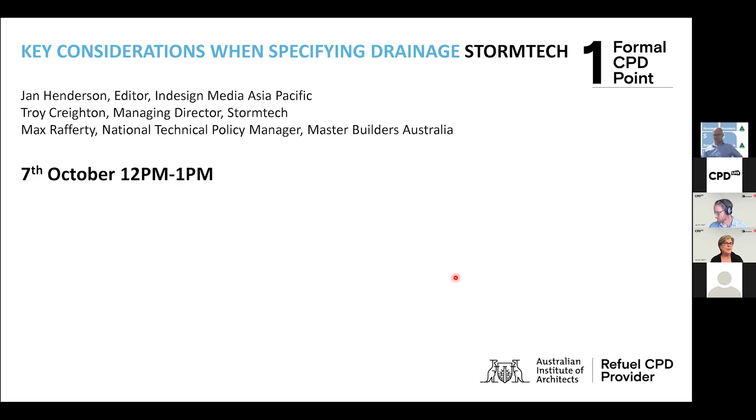Drainage has developed significantly over the years. Innovations like the linear drain have not only provided specifiers with effective ways to prevent flooding, inundation, and subsoil degradation, but also opened up fresh design possibilities.

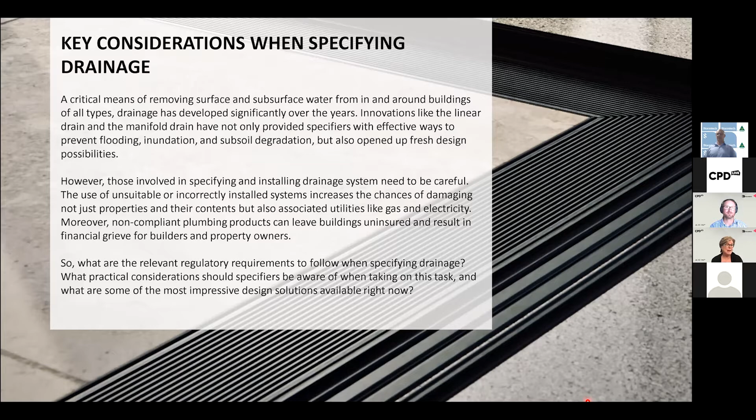But what are the relevant regulatory requirements regarding drainage? What practical considerations should specifiers be aware of? And what are some of the best design solutions available right now? This session, entitled Key Considerations When Specifying Drainage, will answer these questions and more.

By the end of this session, you should be able to identify the relevant code requirements that relate to drainage, evaluate practicalities involved with choosing and installing drainage, apply knowledge and troubleshoot problems associated with drainage installation, identify and define design solutions that conform to the code requirements, and evaluate and apply knowledge for the best environmental outcomes.

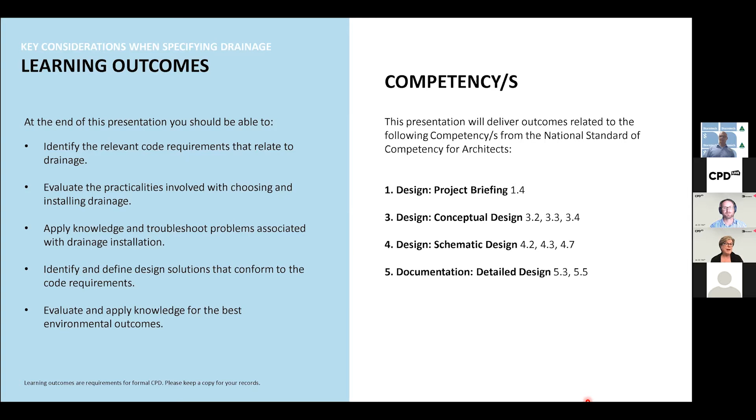Firstly, to you, Troy, could you tell us a bit about Stormtech? What does your business do and who are your clients? Considering today's topic as key considerations when specifying drainage, can you talk us through some of your recent projects?

Thanks, Jan. So Stormtech was started by my father in 1989. Drainage came to us as a solution for our own business. Dad was a concreter and we needed a more elegant solution than your simple cast iron ladder grates in a channel drain. So Dad's inventions spurred the way for architects, engineers, and builders to look at drainage in a different way. And one of the key things that Dad helped develop was the shower channel, which has become certainly a global success.

Recent projects, Barangaroo Roof would be one that most people are familiar with. We've done everything from bathroom drainage through to courtyard driveway drainage, underground, and even some underwater grills and grates that I've only recently found out about.

Fantastic. And Max, can you tell us a bit about your role at the Master Builders Australia organisation? Yeah, hi, thanks. Look, my role as the National Technical Policy Manager with Master Builders involves providing technical advice to the Australian Building Codes Board. I sit on numerous Australian standards, and I also host a Master Builders podcast. So that gives you a bit of an all-round picture of me.

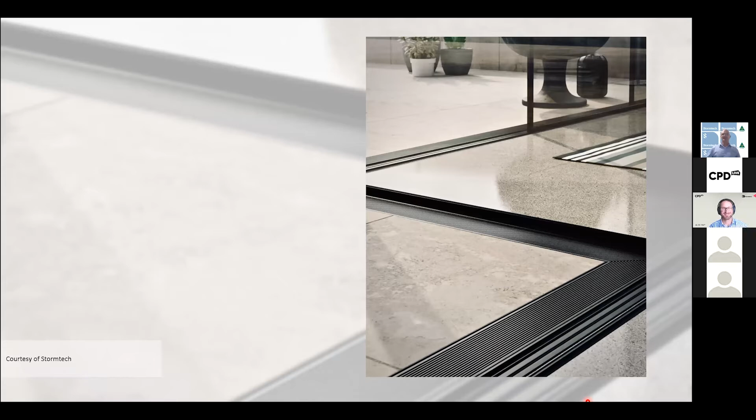So obviously, key considerations about our drainage. I'm going to focus on two areas, and it's pretty obvious. One is stormwater drainage, and the other one's sanitary drainage.

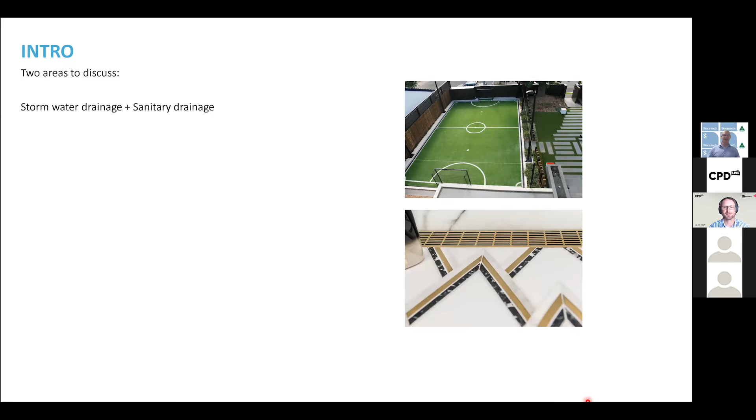What can they be made from? So before we get to the drains, we really need to have a bit of a fundamental idea of what we can make our drains from. For stormwater, there's quite a list here, and as you can see, for roof drainage, so it's not what I do, although we will do rainwater heads and so on where people need a custom solution. There's a huge variety of materials that you can do your roof drainage from.

So why can you use a large variety of materials in roof drainage? Mainly because they're not in the ground, they're less exposed to the conditions, the really nasty conditions that in-ground drainage is exposed to. As you'll see, in-ground drainage is quite a limited range of materials.

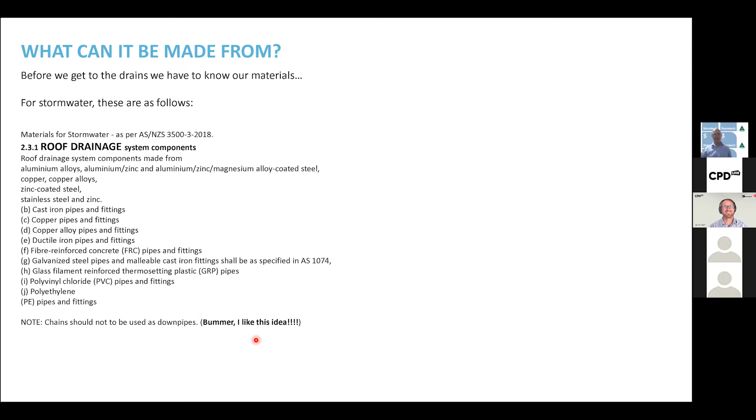And one of the things I picked out from going through the materials and so on is that chains should not be used as downpipes, which is a bummer because I always liked that idea. I thought it was a fantastic little feature, but can't do it anymore.

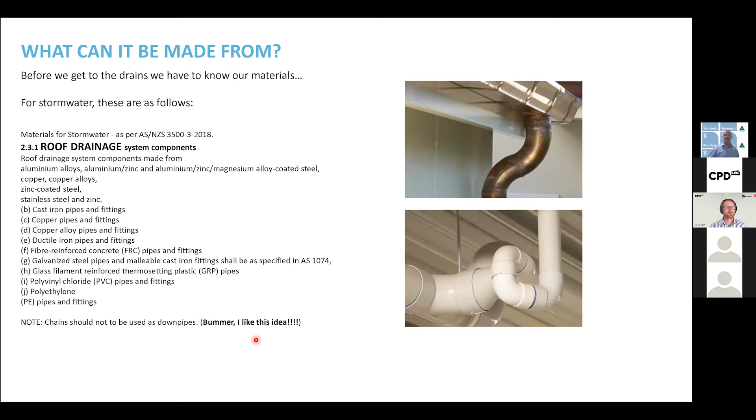So here we have copper. We have stainless steel over copper in this application. There we have PVC. You'll also see that sometimes there are materials that, although you're allowed to use, you can't use them together. So things like copper and zinc, copper and lead, and so on—they can be used, but in a specific method. Now, for stormwater drains, non-pressure, you see the list is quite a bit shorter.

When they're saying aluminized, a bit of an Americanism has crept into our standards there - that's a galvanized or Zincalume style material, not aluminium. We'll get into that quite specifically later. These materials are all tried and proven over many decades.

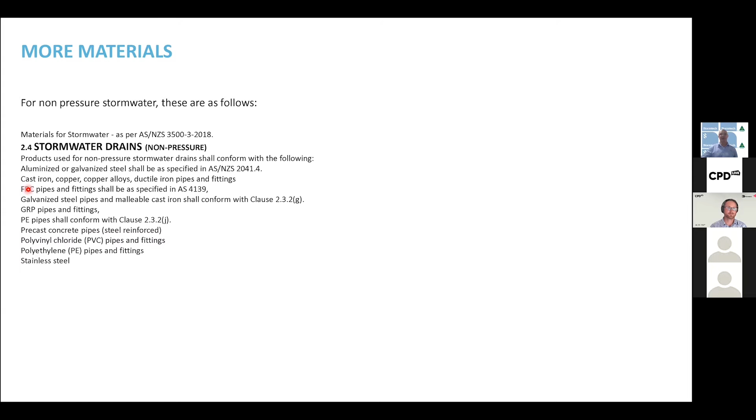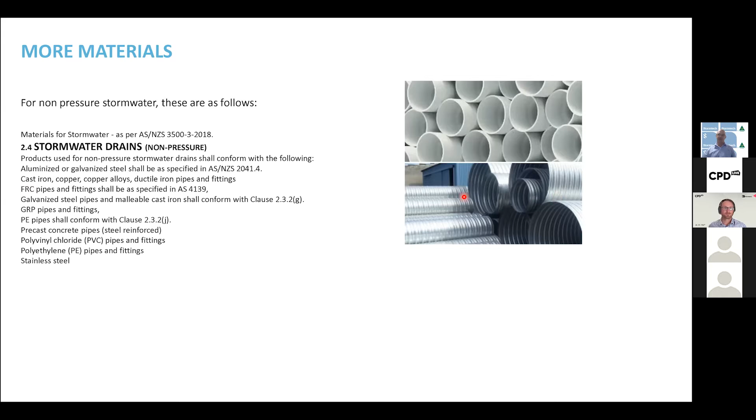See, we have some PVC pipe. There we go, you have your large culvert style. This material, just to give you an idea, typically that's used as formwork as well. And then we have everyone's favorite, the concrete pipe.

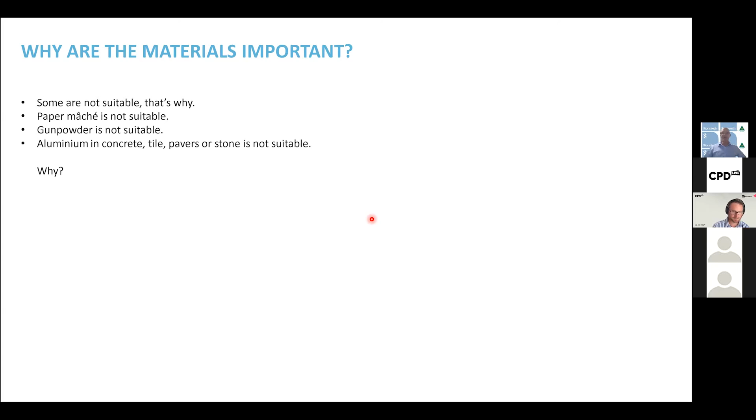As I mentioned, why are some materials important? Well, some aren't suitable, it's that simple. If you look at gunpowder, it's not suitable as a drainage material, nor is paper mache. I think really it's quite obvious.

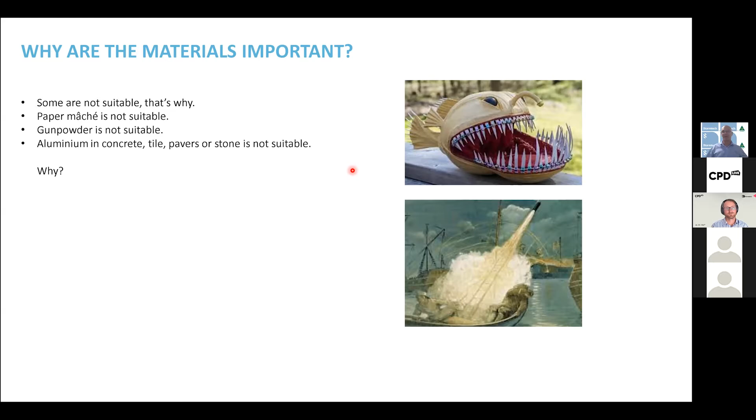Aluminium in concrete, tile and pavers or stone is not suitable due to the alkalinity. This is one of the times when you see something and think, oh yeah, aluminized is okay, but it's not. The Aluminium Council of Australia and the Australian Window Association did a joint technical bulletin. This is available in the summary, I can email it out to anyone that wishes. It's contained in there.

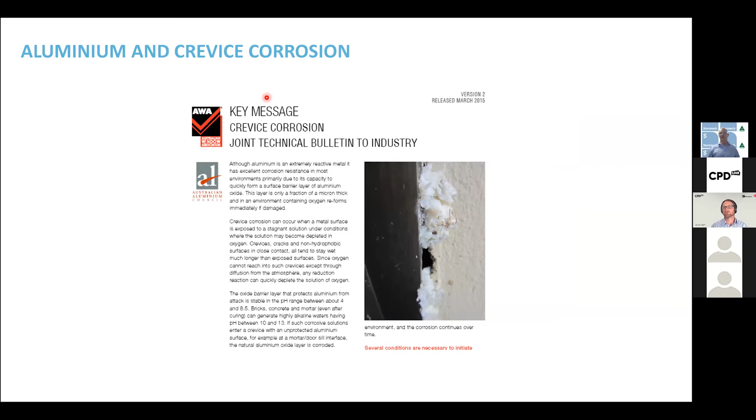Primarily, aluminium is stable in a pH range of about 4 to 8.5. Why is that important if we're not talking about a swimming pool? Well, bricks, concrete, stone, tiles generate waters of between 10 and 13 - 13 when concrete's fresh, 10 once it's cured, which is still above the 8.5. Bear in mind, this is the Aluminium Council and the Window Association, so the true experts of this.

This issue, as you can see here, where you're getting crevice corrosion, needs a recipe to be adhered to closely. You need alkaline waters above 8.5, and you need stagnant water - stagnant water is water that is depleted of oxygen. Just think of your smelly pond, or something you've stumbled across in the bush, or you've lifted up a paver and seen some stagnant water under there. It's depleted of oxygen.

So what happens then is the water depleted of oxygen attacks the anodizing layer - anodizing, no magic there, it's simply aluminium oxide that's force grown. They put it in a bath, run a current through it, and force grow the aluminium oxide. Key word in there is oxide. What happens with the stagnant water in the alkalinity range that aluminium doesn't like is that stagnant water starts to hydrolyze the oxide out of the aluminium, and then the aluminium eats itself in this environment.

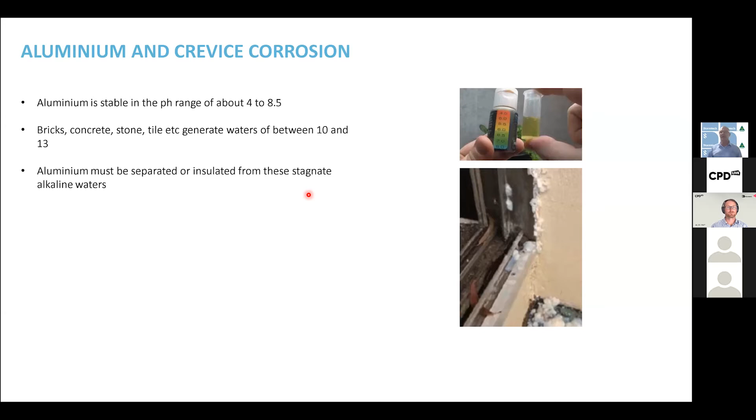That stagnant water, because it's depleted of oxygen, can turn into one of two things. One, a mild sulfuric water, a very mild sulfuric acid, and you get the rotten egg smell. Or the other one, if there's salts around, it can be a hydrochloric acid - very, very mild, you're not going to burn yourself with it, but it'll certainly eat the aluminium.

Aluminium and galvanic corrosion. Aluminium is really corrosion resistant because it is so reactive. It conducts a current very efficiently - most of the power lines we see around are actually aluminium core, not necessarily copper, that's the above ground power lines. So when you put a different metal, a harder metal, with the aluminium, it will corrode on behalf, it will sacrifice itself before the harder metal like steel or stainless. It'll corrode quicker instead of that material corroding.

A good example of that would be your Zincalume roof. The zinc and aluminium coating over the steel substrate is sacrificial. It corrodes because it's softer than the steel underneath. That simple.

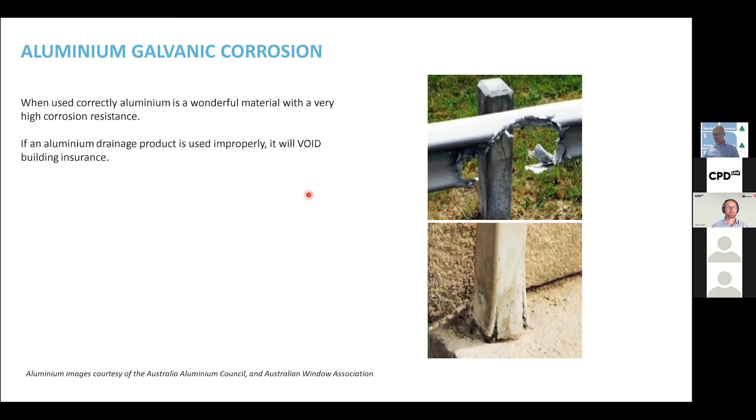Oops. I've gone and touched something I shouldn't have.

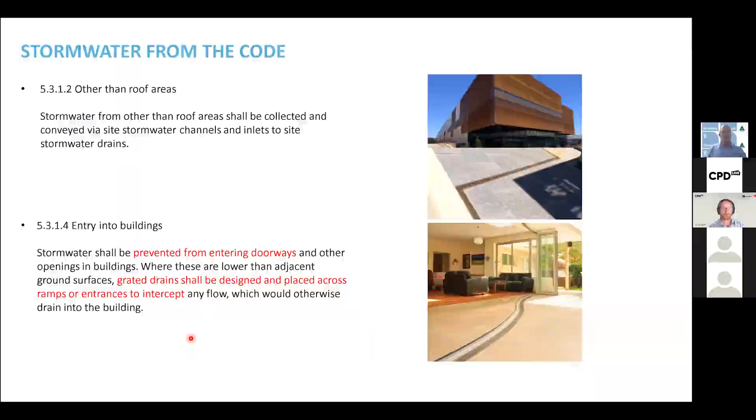Troy, can you stop for a second? The slide hasn't changed, we're still on the stormwater from the code slide. Let me try to fix this. It won't let me go up to display settings. Instead of rushing I'll just take a moment, everyone. Apologies for mucking you around here. Troy, I think you might want to stop screen sharing and restart it again. Starting. And there we go.

While Troy's looking at that, for those of you who are interested in seeing the requirements around door thresholds in the latest code, there's a public comment draft for the National Construction Code, which you can find on the Australian Building Codes Board website.

Thanks for that, Max, that's great. So we'll just get onto the slide. It looks like things are working now, Troy. Yep, that's great, so just move on to where you were and we can pick that up. It's very interesting, so let's, yes, fantastic.

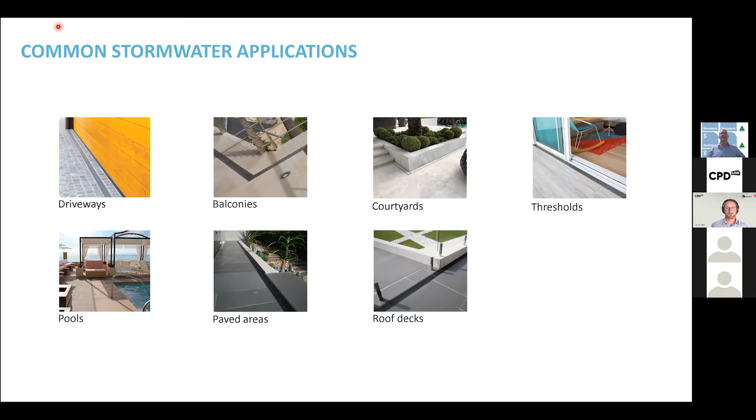Moving on to driveways. In front of a garage, try and keep the drain, if you're using a linear one in particular, about 300 to 600mm, so 1 to 2 feet in old speak, away from the garage door, and slope from the garage door down to the drain. Try and avoid having the drain too close to the door. That's purely for surge when you get your peak rain event.

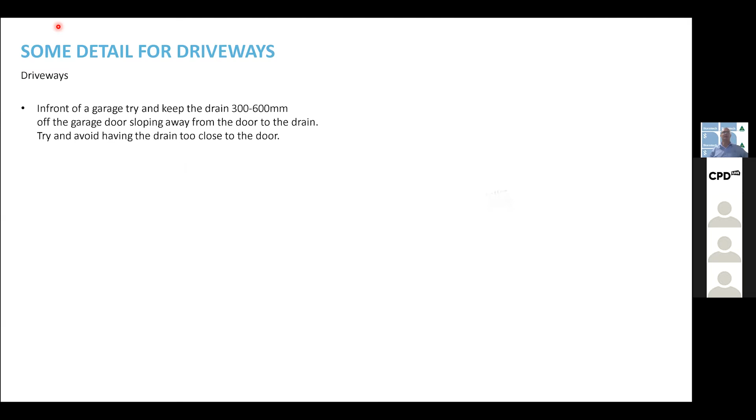If there's any downstream blockage, typically in your municipal stormwater that's filling up, sometimes it takes a moment to catch up with debris being pushed through. Now, load rating: I would suggest a minimum class B for any driveway because cars are getting bigger and heavier with four-wheel drives, and also with the rise of home delivery being more and more frequent. A lot of these smaller courier trucks are Class C, and it's the front wheels, the steering wheels, that carry the heaviest load, and they're the ones typically going to be going over a drain if you have one in your driveway.

Here we have different load classes that we make for, so these were the most fun ones to do when we did the A380 ones.

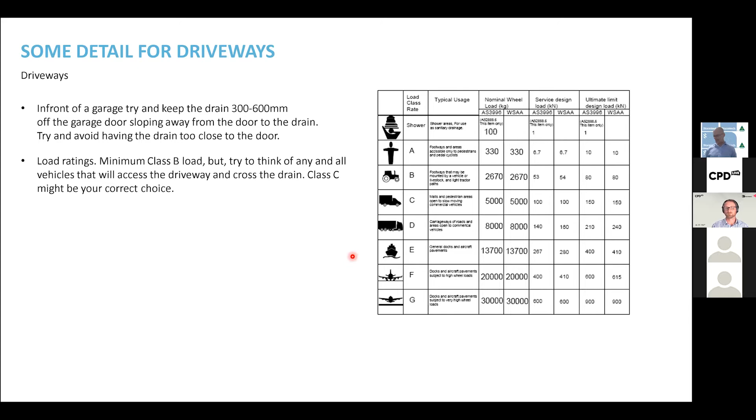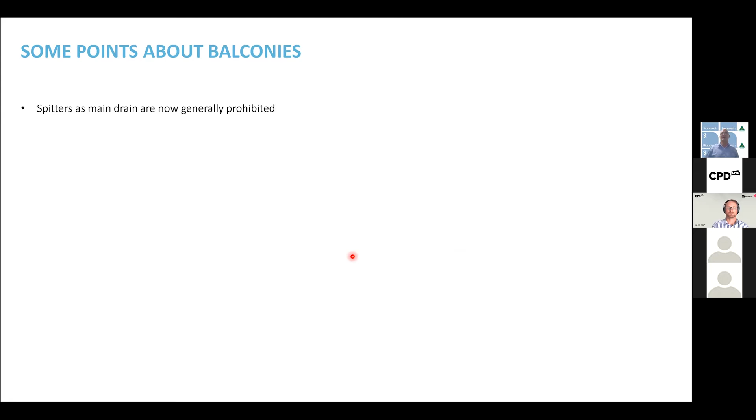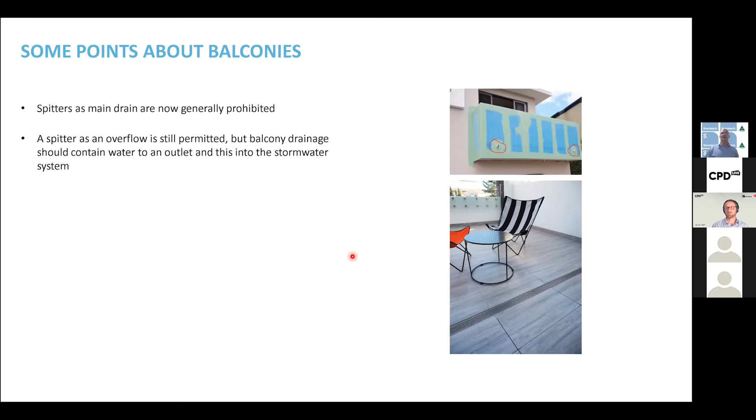And some points about balconies: spitters as a main drain on a balcony are now generally prohibited. There are some jurisdictions that still allow it, but very, very few. A spitter as an overflow is still permitted, and in many cases is actually required, but the balcony should contain the water to an outlet into the stormwater system.

Now I'm going to hand over to Max here. This is a new and emerging area. So Max, I'll let you take it away, buddy.

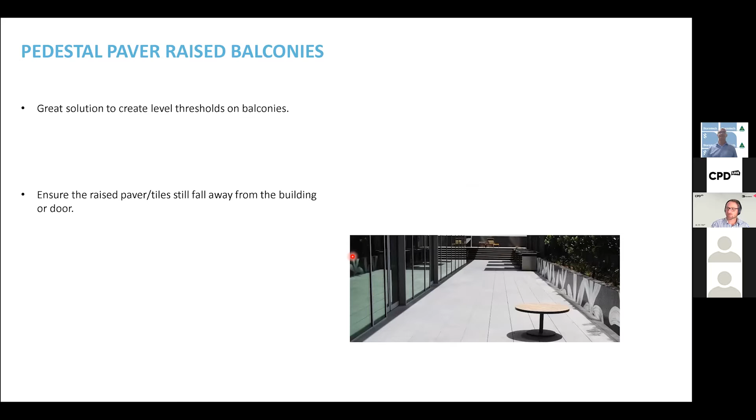Thanks, Troy. Look, what we're looking at here is a pedestal paver over a raised balcony. They're a great solution, I'm sure many of you have seen them. They're a great way to get a level threshold when moving from inside to outside.

It should be noted that whenever you're going to look at implementing this type of system, you should always be looking to engage a hydraulic consultant to make sure there's adequate drainage allowed for, and to also consider the overflow.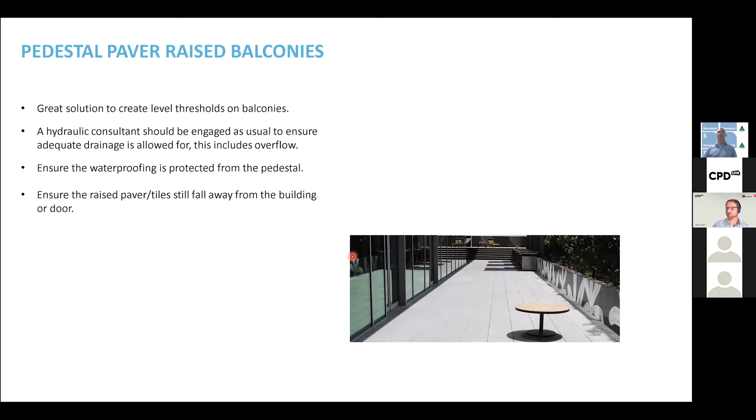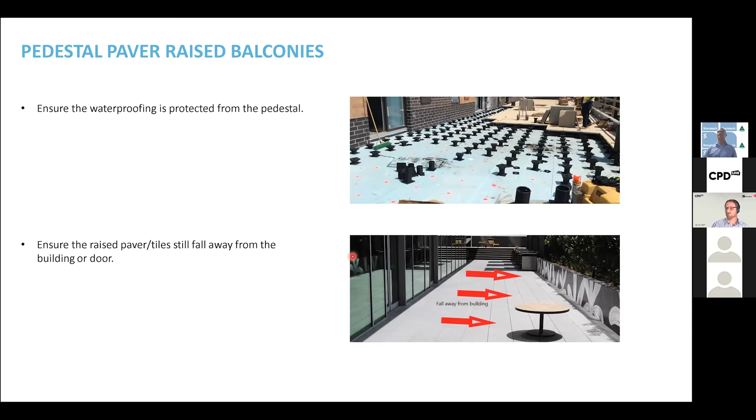A few key points with this around ensuring waterproofing is protected from the pedestal which the paver is sitting on. Also ensuring that the raised paver tiles still fall away from the building or the door.

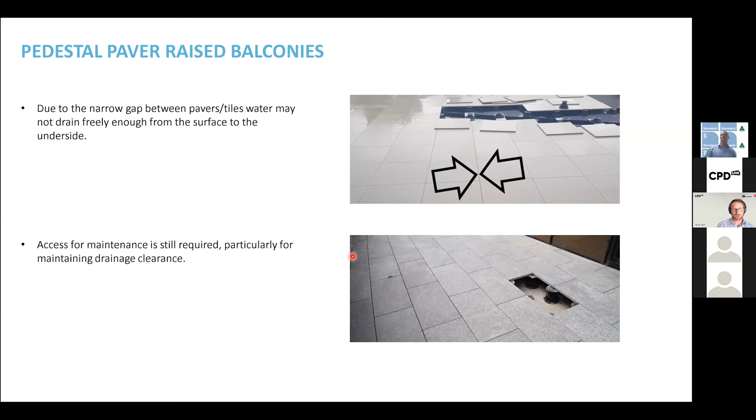Due to the narrow gap between the pavers and tiles, water may still not drain freely from the surface to the underside where the water is collected. One of the beautiful things about these systems is that they allow for access and easy maintenance, particularly for clearing drainage, also repairing membranes if there happens to be any damage.

Oops, sorry, I jumped ahead.

Look, on the point of ease of drainage between the gaps in the tiles - clearly where you've got these tiles sitting out on a balcony, you don't want a massive gap. You don't want people falling through it or tripping, creating trip hazards. So you always want to make sure your hydraulic consultant knows what the spacings are, the adequate spacing to actually collect the amount of rainwater likely to occur on the surface.

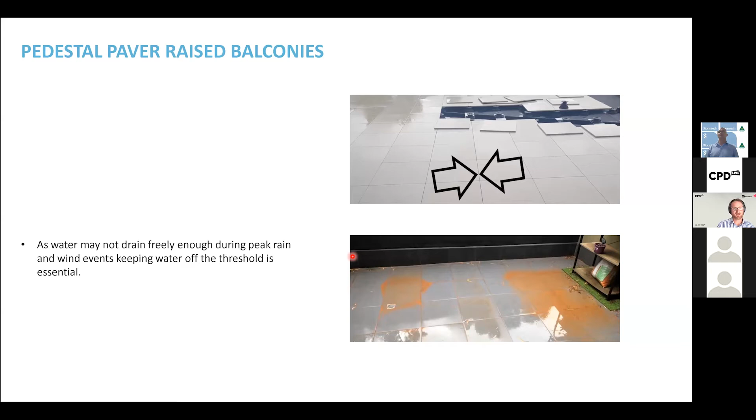One of the other parts that should be considered with these types of systems is a free draining grate at the threshold, which will also help manage any issues with water buildup and allow for drainage before it potentially enters the building. These drainage grates are fantastic at the threshold because they also allow you to get access to the door tracks for maintenance.

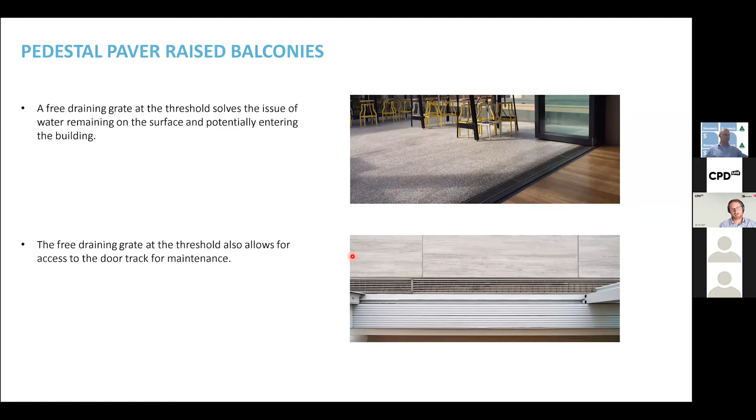And now we're moving on to courtyards. Thanks for that, Max.

Courtyard drainage suggestions: number one, as designers, choose the one that suits the look you want, but check with us to see how resistant it is to the entry of debris for any blockage. Plants in pots, garden beds that are raised or on ground, they can all contribute to blocking drains.

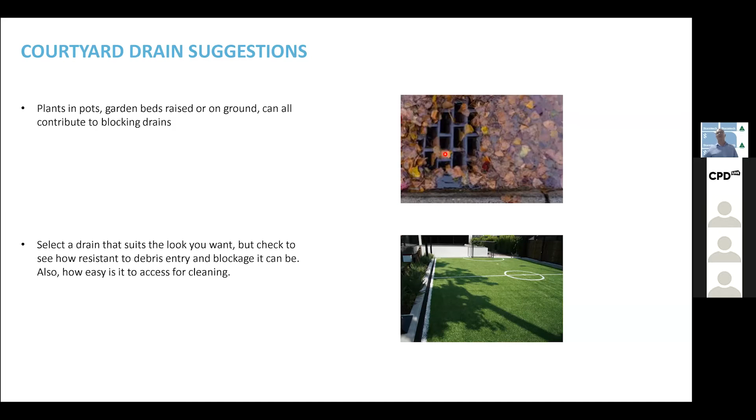Now, pools. Pools are an interesting one. I only recommend 316 electropolished stainless as it is most durable. Electropolishing the stainless increases its corrosion resistance.

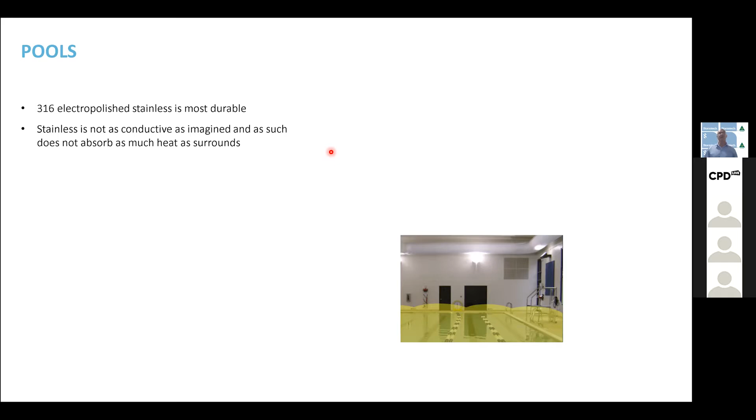Now, stainless is not as conductive as you might imagine. By conductive, I mean its ability to conduct electricity or heat. So outside, a stainless steel grate shining in the sun will be warm, but it's not going to be as warm as that paver right up against it. Now, because I've mentioned electropolishing - if it's near the beach or around a pool, we always say electropolish.

Now, a special note for indoor pools. All pools will outgas chlorine. Indoor pools have one particular issue: as the gas is percolating out of the water, in an outdoor pool it's going to move away. But indoors, you often do not have that, especially when the pool is not being used. So at night when it's shut down, the pool is still outgassing chlorine, but because it's heavier than air, it settles in a thin layer, about 200 to 300 mil thick, around the pool, creating concentrations of this chlorine gas.

Now, it will rapidly corrode most metals, it will discolor paint, and in one example I saw, it was an actual health hazard. There are standards for air movement in enclosed spaces that will allow adequate ventilation and move this chlorine gas before it forms a layer concentrated enough to eat your stainless. It'll tea-stain it massively.

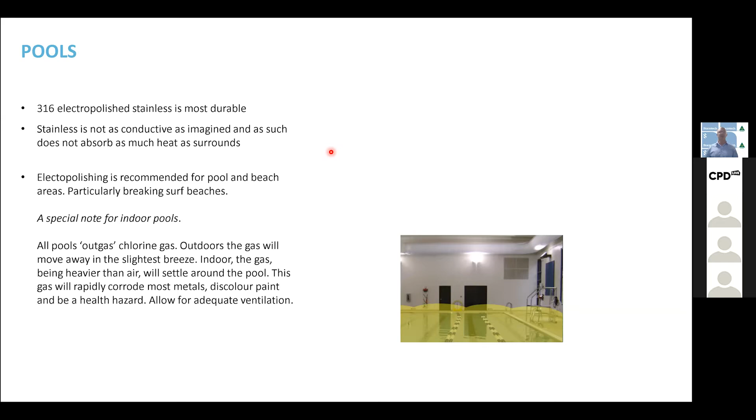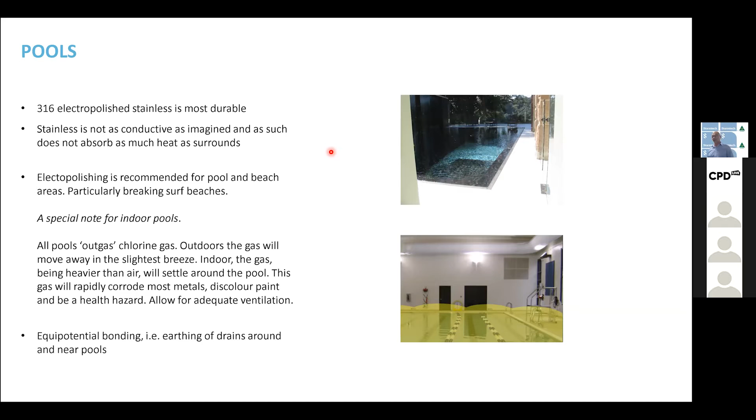Outdoor pool there. Now, another one: equipotential bonding. So here's one to take with you to pub trivia when the pub's open. That's basically earthing of drains around and near pools. So why is that, you ask?

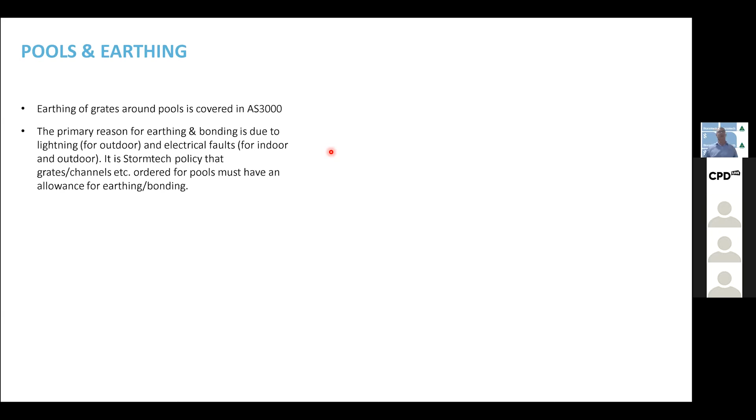It's covered by Australian Standard 3000. The primary reason for earthing or equipotential bonding is due to lightning for outdoor pools and electrical faults for both indoor and outdoor pools. So it is our policy that grates and channels ordered for pools must have an allowance for earthing or bonding, typically a tab that will weld on, or a hole so that they can be joined together.

Rule of thumb, make it easy on yourselves - don't lose the will to live reading code like I do. If you're thinking Stormtech, any stainless grates, if you're within 3.5 meters of a pool, they're to be linked together with a stainless or other non-reactive but conductive wire. That's called equipotential bonding, and you need that done by an electrician with a bonding setup, so that everything, including the reinforcing steel if it's a concrete pool, is connected.

Your handrails, columns, all of that good steel stuff within 3.5 meters - assume it's got to be bonded, and it goes to a junction box with an earth rod rammed down into the earth. Can't remember how far, is it 1.5 meters or 600 mil? But the sparky now needs to get involved. You just need to know that it's all got to be bonded. The pool builder and the sparky need to work that out for you.

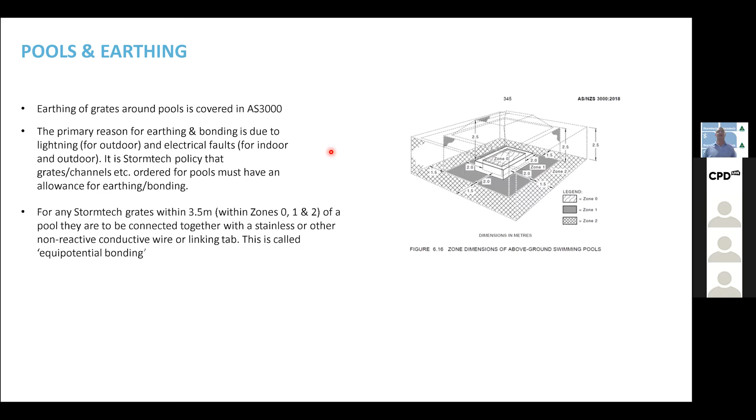Now moving on to thresholds. I'm going to throw it back to Max for this. You there, Maxie?

Hey Troy, sorry, I was getting neck deep into some of these questions coming through. Good one, mate. All right, thresholds.

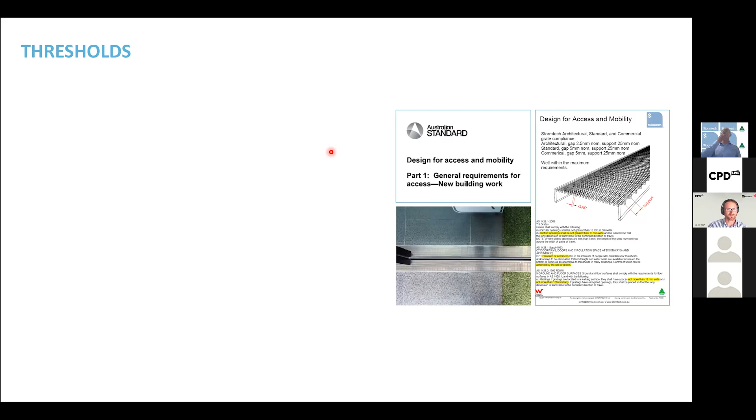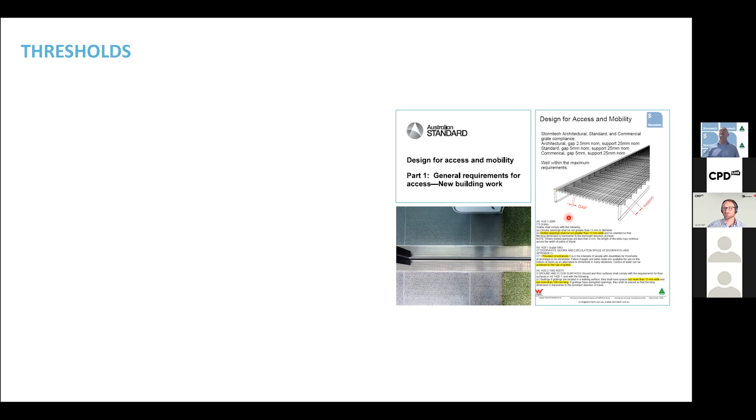So there I've got, for Max, what is the AS 1428 requirements for grates. That's all covered in this section here, and there are new design standards coming out.

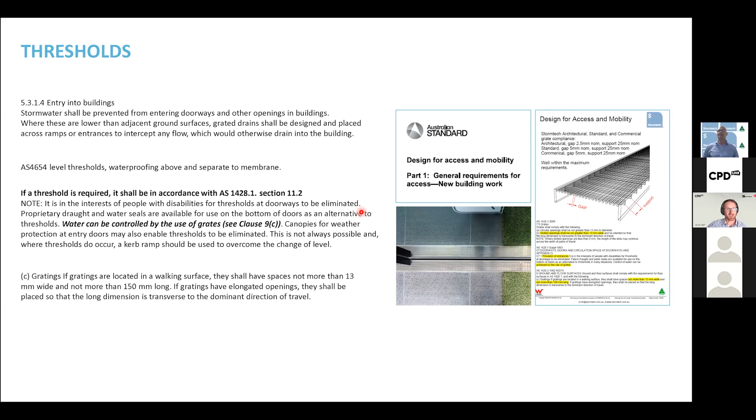Max, I'll let you talk through that one. Thresholds for external waterproofing - a threshold from an internal to an external space, podium slabs, outdoor decks, verandas, things like that are very important for keeping water out. Where you've got the step down, it's managed to help prevent wind-driven rain and wind-driven water, as well as allow what is termed freeboard, to protect the internal of the building from any water sitting outside.

Troy, I might let you talk a little bit about the level threshold, because this is your space of expertise. Yeah, I'll hit you up on lightweight roof decks, which is coming up next. Long story short, everyone, as Max mentioned, National Construction Code 2022 version is up for public comment. I strongly recommend becoming familiar with it because there are some significant changes. However, it is not 2022 yet, and we have to work with what we have. So here we have NCC Volume 1, Part D3, D01, DF1, DP2. You've also got AS 4654, which has a detail for level thresholds.

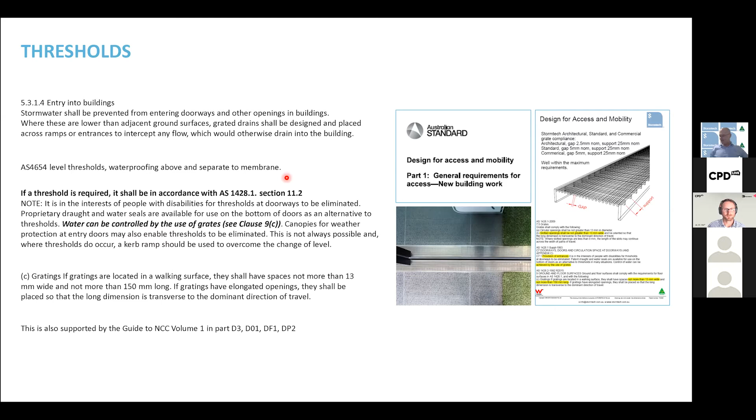Summary of that is waterproofing is above and separate to the membrane, above and separate to the thresholds. The threshold waterproofing, the drain, is above and separate to the membrane - you're not integrating it into the membrane like you would with a vinyl floor. And then we're back to 3500 part 5.3.1.4 for entry into buildings. Entry into buildings is a critical one. And when you've got something like a lightweight deck, Max, I think this is one you're best to talk about.

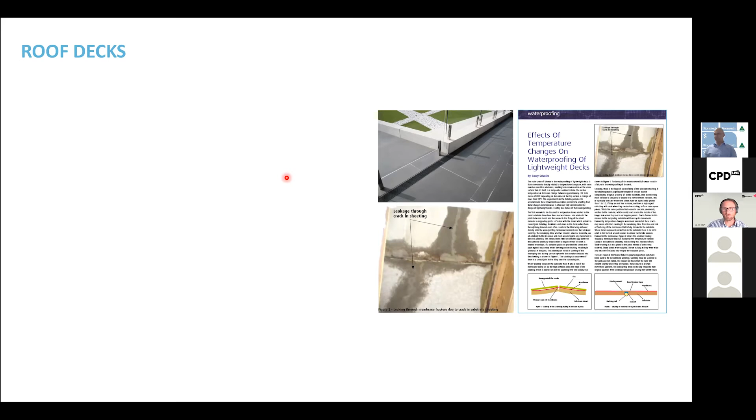Yep. So where we're looking at roof decks, look, everyone will have seen a roof deck over a habitable space. This is clearly a high risk construction design scenario. They're being built and designed in numerous ways. Lightweight roof decks are becoming more and more popular, but they definitely have some specific waterproofing and drainage issues.

The things that make these really challenging is generally that they're sitting over the top of living spaces. We would strongly encourage the use of stainless steel channels on lightweight substrates exposed to high temperatures. Obviously with the temperature ranges that rooftop decks will be exposed to, you really need to make sure your materials are stable. If you're looking for more information, there's a great resource in Barry Schaefer's technical article, Effects of Temperature on Waterproofing of Lightweight Decks. This will really allow you to have a deep dive into the topic, and we would strongly recommend you get your hands on the article.

Couldn't agree more, Max. Just to give people a bit of context, I took a temperature probe into my car park that's got light coloured concrete, and on a hot day the car park surface got up to 80 degrees. Max, what's the failure point of most liquid applied, not sheet, but liquid applied membranes? Isn't it something like around 50 or 60 degrees? Yeah, it's around that point, Troy. I couldn't tell you exactly, but yep - as far as the 4858, they're tested to 56 or 54 degrees. After that, there's no guarantee unless the manufacturer specifically has one for you.

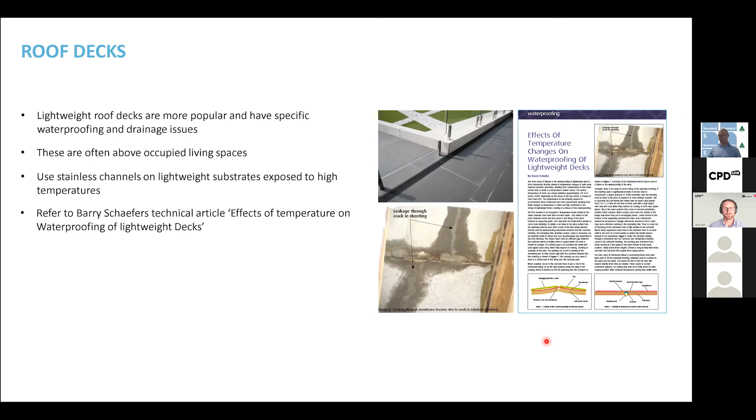Sanitary drainage, yay, we're here. Troy loves talking about this, he just can't help himself.

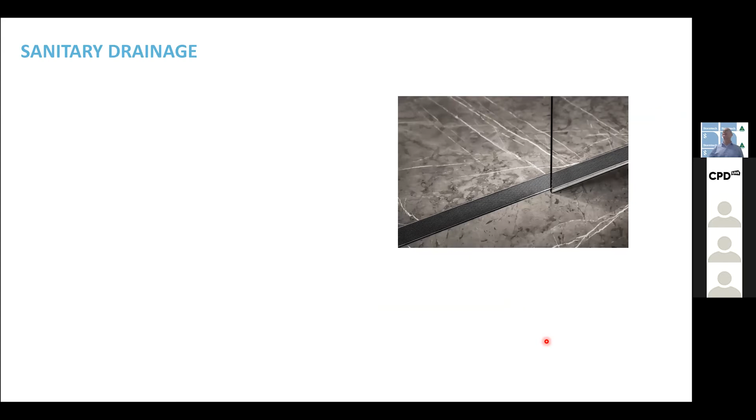Aluminium is in this list, but WMTS 040 2021 says it should not be used when it's in contact with cement. This comment here is incorrect, that was as at 2018. The 2021 version put aluminium back in.

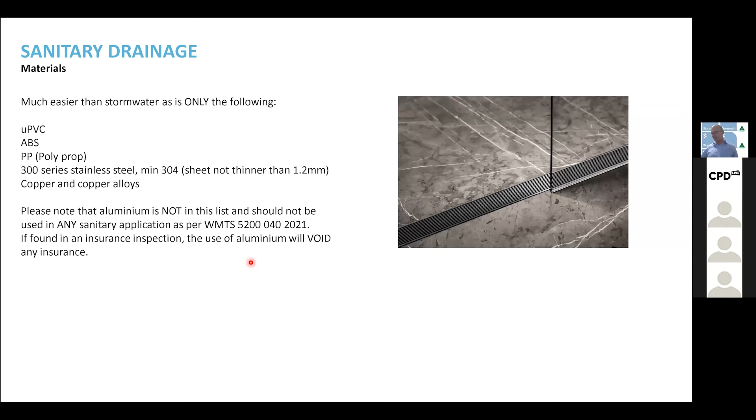But building insurance will still be void if people are using aluminium as anything other than a grate. If you're using it as a channel or tile insert style of grating, it's going to be a fail because of those alkalinity issues. So although you're allowed to do it, even the watermark says you shouldn't unless you can protect it, and the processes and steps of protecting it are riskier than simply not using it.

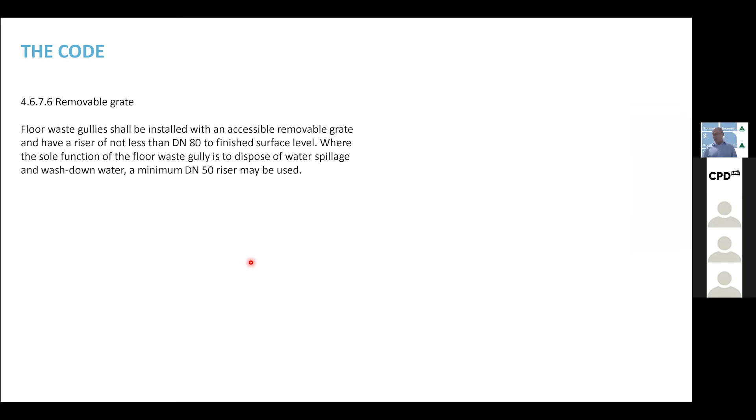So the code, out of AS 3500 part 2, clause 4.6.7.6, removable grate: floor waste gullies shall be installed with an accessible and removable grate. So here we have a tile insert version.

Now, don't be trapped like many people have been, where the sole function of a floor waste gully is to dispose of water spillage, and this is what traps everyone. Wash down water, a minimum DN50 riser may be used. Plumbing inspectors around Australia have been trapped by this one, interpreting with the best of intentions. But wash down water doesn't mean you are having a wash. Wash down water means you're giving the wall a wash after, say, the dog got in and shook dirt all over the wall and you're giving it a wash. That's pretty much the spillage.

And when you're washing the room, that's when you can have a DN50 riser, not to try and shoehorn in a DN50 into a shower.

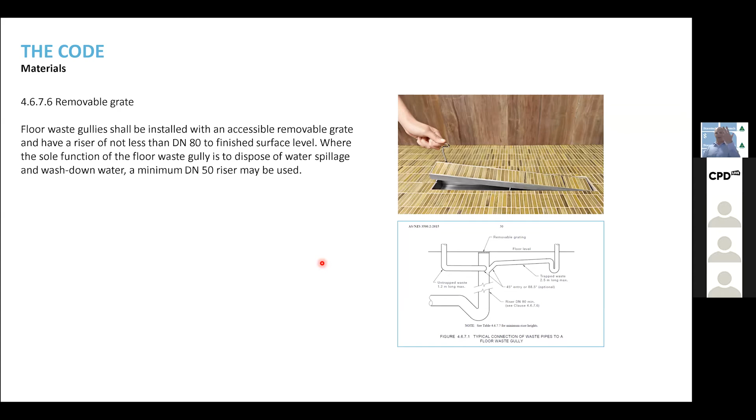Practicality: it's easier to get your hand down a DN100 riser than it is to get your hand down a DN80. DN80 is 76.2 mil maximum, 69 mil minimum, and you've got to be really having small hands to be able to get your hand down there.

Now, a bit of interpretation of that drawing. So main riser, minimum DN80, or you can put a 100 straight up there. Either side, you can go down to a minimum of DN40 for a shower. So you're not stuck with DN80 or DN100 in a shower.

DN40 is suitable if it's untrapped, as in no water trap or water seal, only 1.2 meters from the riser. If it is trapped, 2.5 meters. It used to be 2.4, so they've given us an extra 100 mil there.

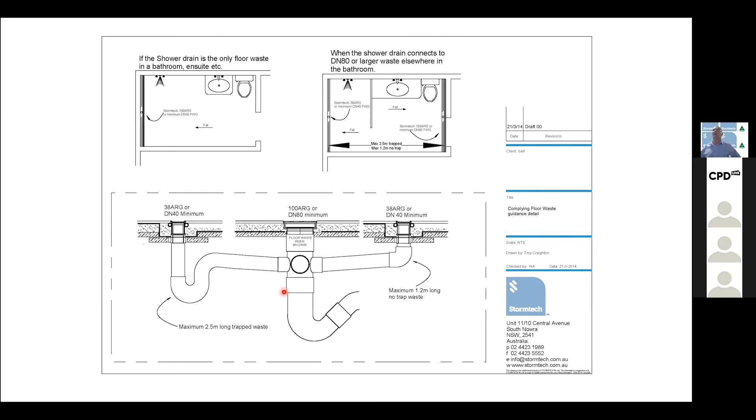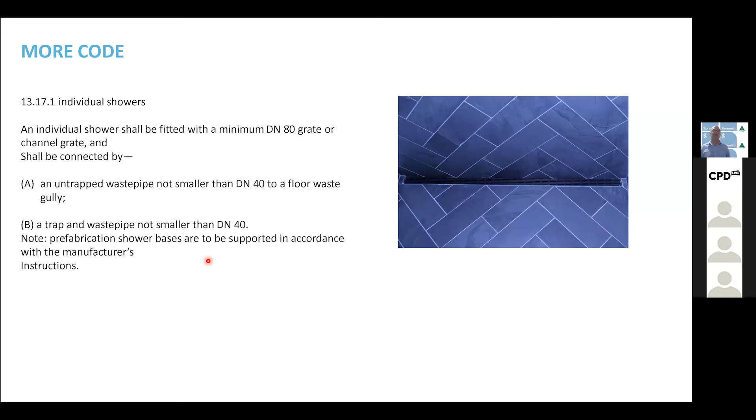Now, more code. Just before you lose the will to live with code, here's where you get your info on individual showers. AS 3500, clause 13.17.1, individual showers: a minimum DN80 grate or channel grate, connected trapped or untrapped, not smaller than DN40, a trap not smaller than DN40, and shower bases are to be supported in accordance with the manufacturer's instructions. Why? So they don't bend and flex and bugger up your waterproofing, you get water downstairs and upset the neighbours.

So clause 13.17.2, why is this one important? We're talking shower groups, multiple showers, double showers are common now. Straight out of AS 3500, you've got how many showers, what size of grate, and the size of the discharge pipe. Very simple to put together, but most people don't actually read this bit because then we're talking about common channels.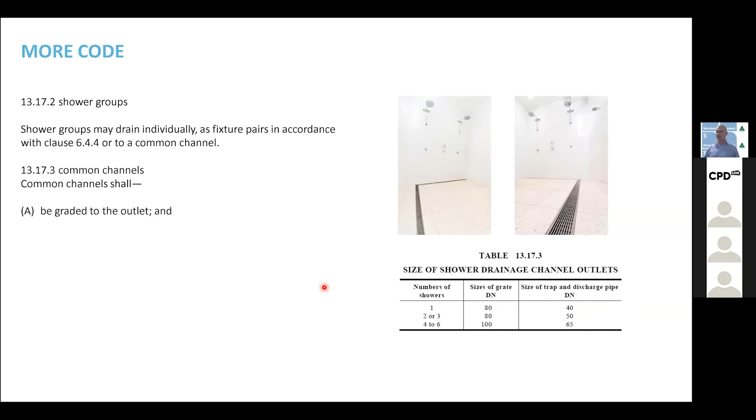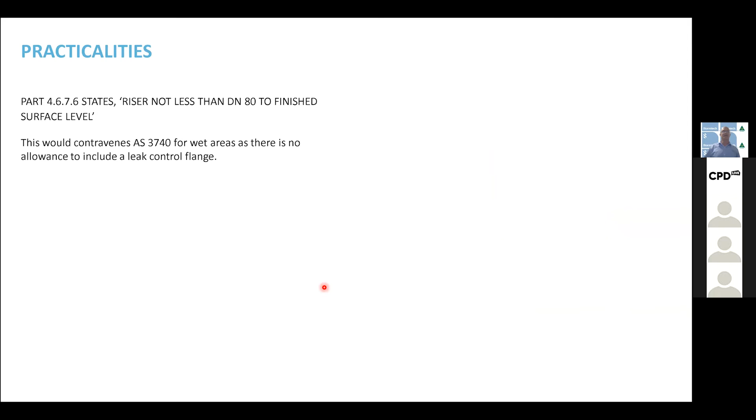They shall be graded to outlet, and you follow this chart here. Graded to outlet means you can have a center break in the middle of your channel, or you can have a cross break, which is like the X. The practicalities: 4.6.7.6 states riser not less than DN80 to finish surface level. That would contravene AS 3740 for wet areas, as there's no allowance for the leak. And where can the flange go?

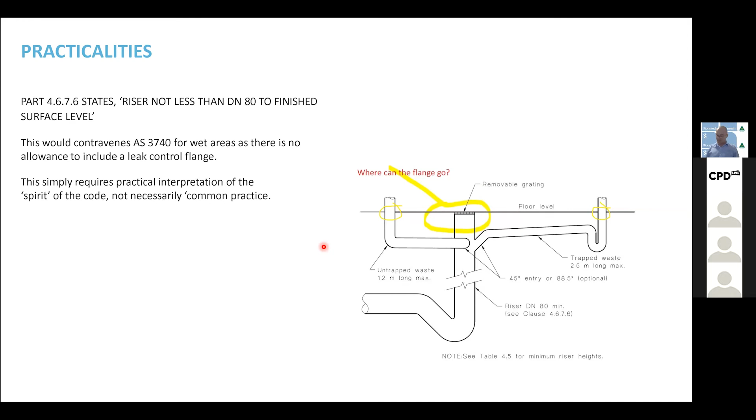From that, let's not forget the code is the minimum. It's not the gold standard to aim for, it's the platform that you start from. It's the minimum. So when you're looking at the code, think about the spirit or the intent of the code, not necessarily what your dad the builder, or Bob the plumber, thinks is common practice and they've been doing it for 40 years. They might be flat out wrong with the best of intentions.

So, foundation standard. Now, AS 3500 takes its information from a variety of sources. They don't write the plumbing code as a standalone document with no input from anywhere else.

So as far as we're related to drainage, this is the 2018 version - I know there's a newer version out at the moment, but NCC is not referencing it just yet. These are the parts of the code that I've been talking about, 467, 1317, they take a lot of their info from 2887 and the old AS 5200, which is now WMTS 040. I'll send everyone out the updated one - I don't know why I've been using this one, it's the 2021 version.

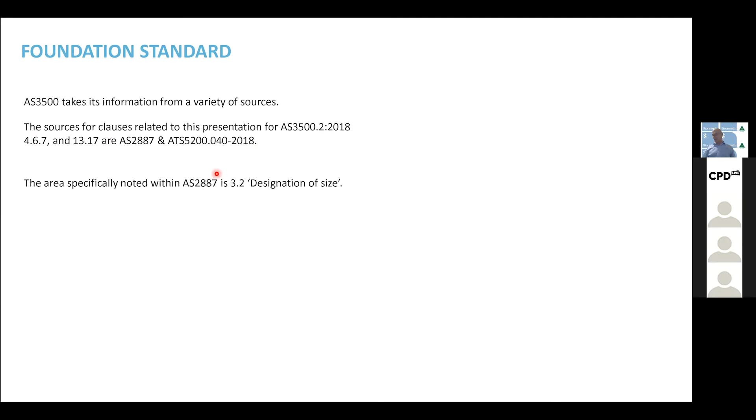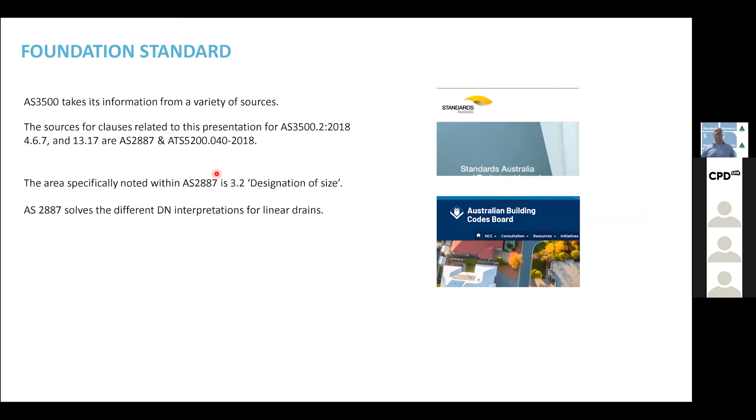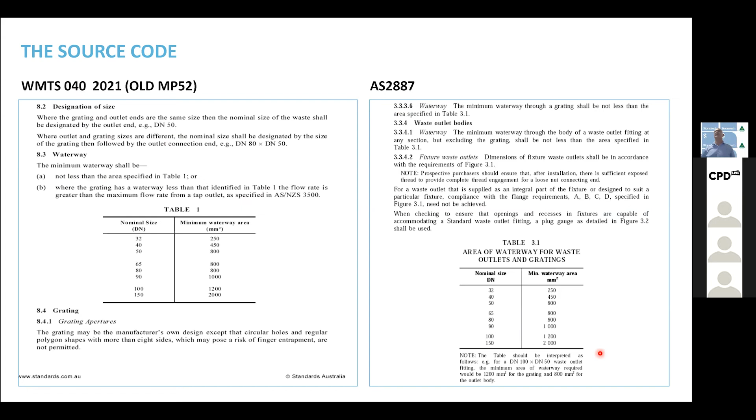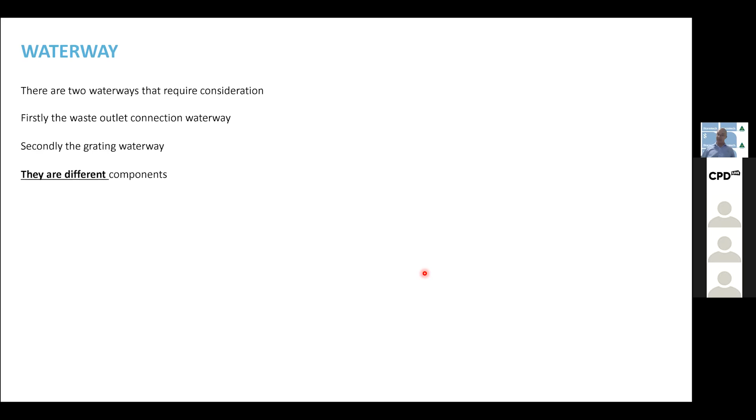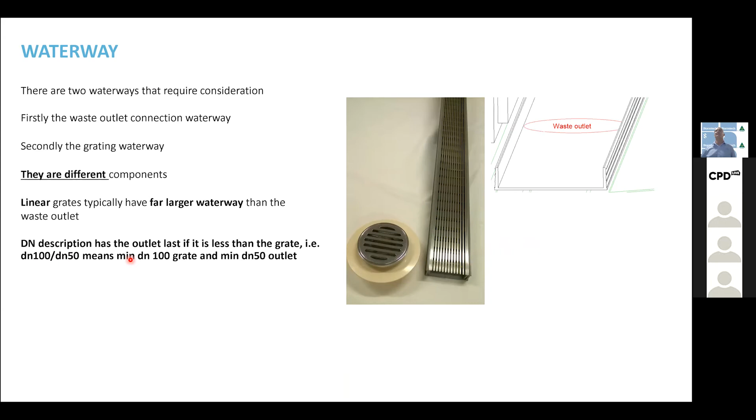So, waterways - two waterways. We've been talking about the minimum DN80 grate and the minimum DN80 riser. The grate and the waterway are different components - one's the grate, one's the outlet. A linear waste typically has a far larger waterway than your typical waste outlet. Work out the square millimeter area of that, and then work out the square millimeter area of that - this is exponential compared to that one. So a descriptor here, DN100/DN50 means, okay, I've got a DN100 rated grating over a DN50 outlet, which would be the waste outlet in the channel or in your center waste.

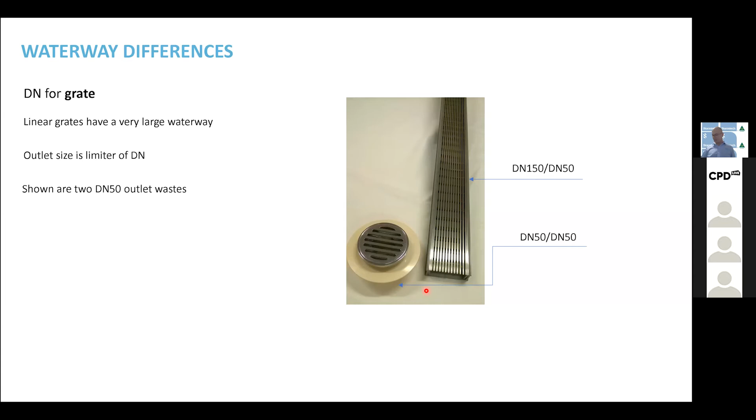So DN for grates, very large waterway, as I've mentioned. Outlet is typically the limiter for a linear drain. So here we'll see in just a moment the DN for the waste outlet. These are both the same DN50 waste outlet, and in the image I've tried to make it so they show they are actually almost identically sized.

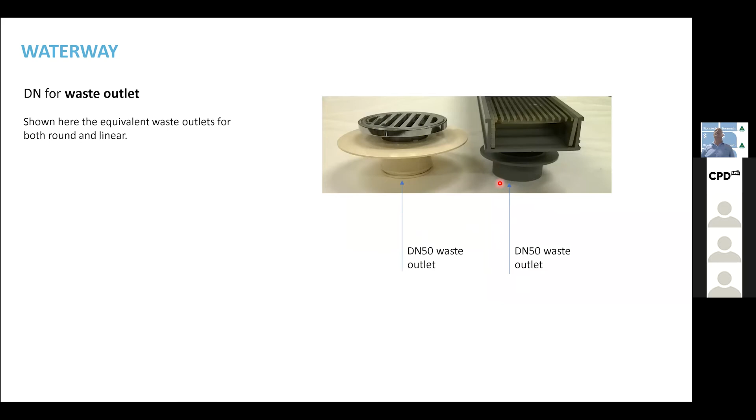Fit for purpose - if it doesn't have a watermark, it can't be used, and this one here cannot be used. You can't take the flange and throw away the grate and put a different grate on, because they're watermarked as a system. These are watermarked as components and tested. The flange can't be used - this flange cannot be used without that grate. If you put, say, one of my grates over the top of this, I'm fine, but you don't have a watermark certified leak control flange. And if you have any problems here, your client's home building insurance is void.

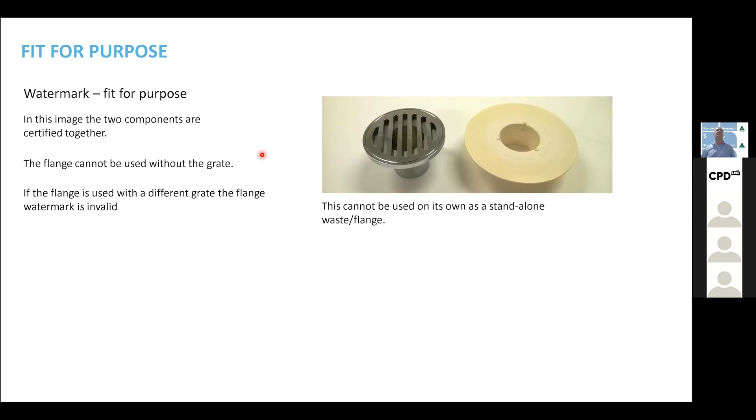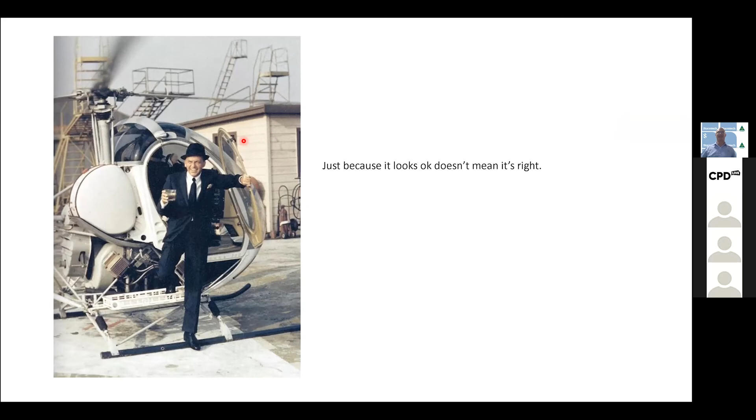So as I mentioned, in the standard it's the minimum, not the maximum, and just because it looks okay doesn't mean it's right. My hobby's helicopters, and although I think Frankie here is quite cool, I can see quite a number of things that are catastrophically wrong. So thank you very much, I'll end my screen sharing here.